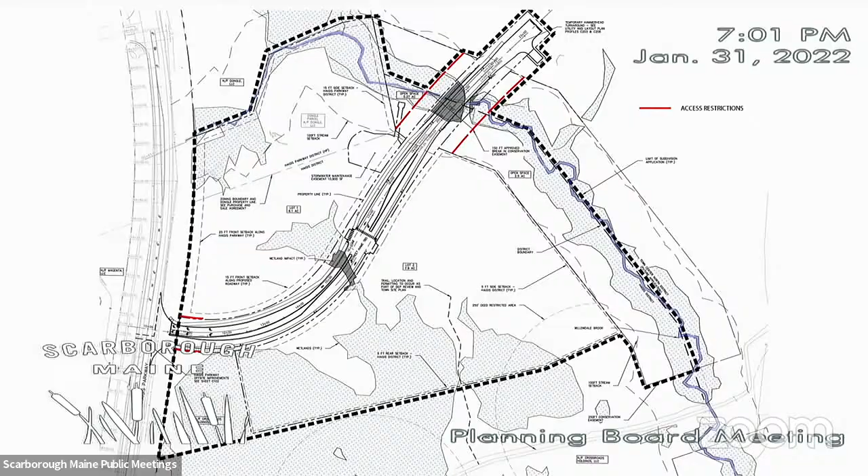Within those red boundaries is our approved break in that conservation easement for the road alignment. Those were all approved. So really what we're seeking through this subdivision application is to proceed on the town approvals to lay out and approve this segment of road.

And create two larger lots. Lot 1 is on the north side of the road, about 6 acres in size. Lot 2 is on the south side, around 8 acres in size.

Those two lots would of course come to you for site plan before they're developed. They also would go before Maine DEP before they're developed, because we need approval for stormwater design for those lots. This is very similar to an item later on your agenda, the Costco site, where we got a lot approved, built the road infrastructure, but marketed the lot before proceeding with permitting with the town and DEP.

That's really what we're seeking discussion on this evening. And then into final review is the ability to proceed with our state permits on building this segment of road, which actually can't generate any traffic or development until we come back to you with site plan and DEP approvals on the different lots.

We're not proceeding with the road past the stream because we're still working with the town council, the downtown committee, and we'll be coming to the board with an updated plan for the town center later this spring, could be late winter, to lay out that area of the project.

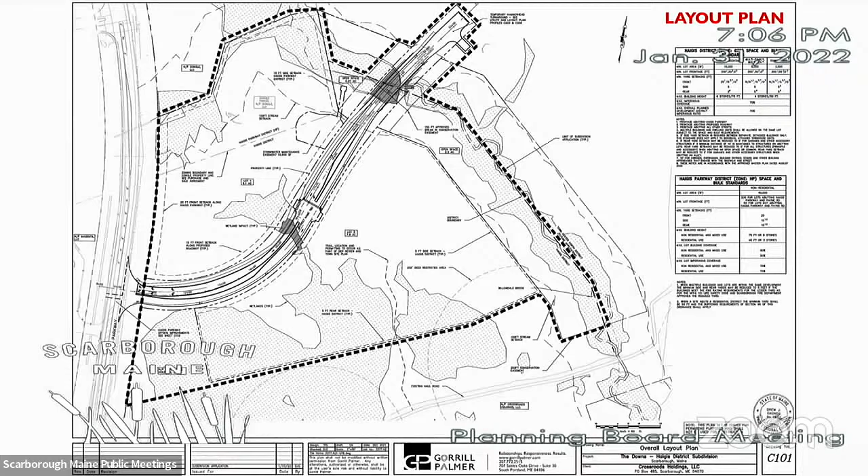With that, we're proposing an 8-foot wide multi-purpose path that would connect to the future town center that Dan was mentioning, and connect to pedestrian improvements along Haigis Parkway that will be also in the future per our Maine DOT TMP. That 8-foot wide path is going to run all along through the brook and all the way down the south side of lot 1 and terminate at the right of way, basically the intersection connection for future pedestrian connection. Along with that, we have an 8-foot wide, plus or minus, center island as kind of the gateway treatment as we enter the downs.

Our goal was to match the Payne Road side and the Route 1 side, where we have a large center island with a tree-lined boulevard on either side and down the middle, creating that signature appearance that you're entering the downs. We've continued that from Route 1 and Payne Road over to Haigis Parkway, and we're excited about that. We've also shown two entrances: lot 1 on the north side of the proposed road, and lot 2 on the south.

With these entrances, we're showing left turn lane pockets. There was a comment in the staff and peer review relative to queuing for these left turn pockets. We designed this road conservatively, not yet knowing exactly what's going into these sites, so we want to be conservative with our left turn lane queuing. We're happy to provide calculations and other supporting data to warrant these left turn lanes, which we think is a good design.

This is the landscaping plan I have up here. If we need to go back to it, it just shows some of the trees I was discussing along the center island and on the outsides of the road.

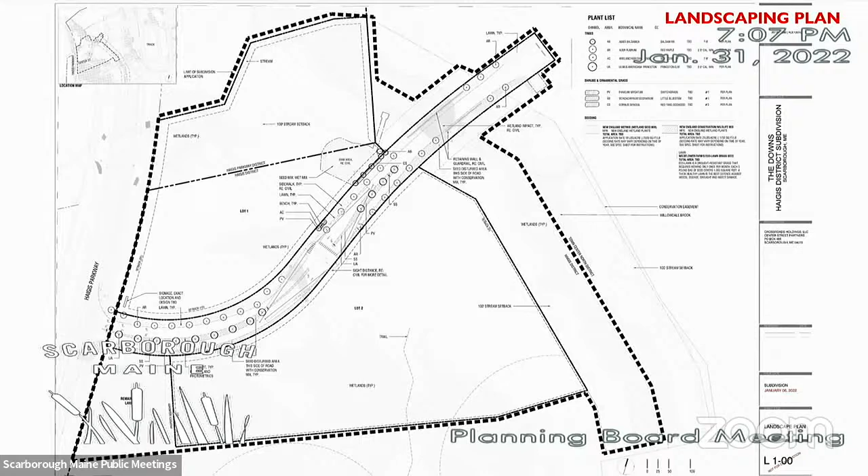As far as the utility plan, the dashed lines are the existing utilities in Haigis Parkway, and the bold lines are the proposed utilities as part of this subdivision. We're essentially isolating this area to serve only off Haigis Parkway, not using any existing or planned utilities on the rest of the downs parcel. We don't need to connect to anything on the downs from a utility perspective—everything can be served from Haigis Parkway from a capacity standpoint, which is good and cost saving for this team. We're terminating gas, 8-inch sewer main, and 8-inch water main at the lots 1 and 2 entrances, right in the middle of your screen. The red line is the overhead power that would be extended from Haigis Parkway, then go underground to serve the sites.

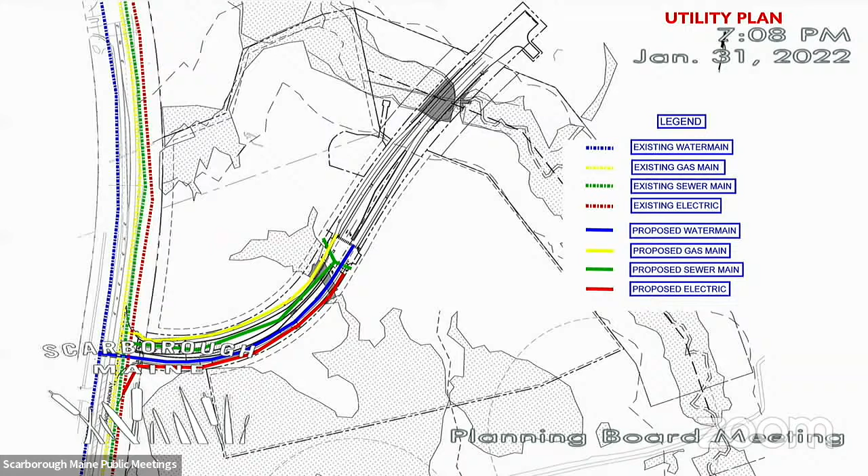The existing drainage in this area essentially all slopes to the north and east towards Willowdale Brook. Willowdale Brook wraps around the page, starting at the top, and flows downstream as it runs around the page corner there.

Per our Maine DEP approved stormwater plan, we have one grass underdrain soil filter in the top left corner of the roadway, which treats that shaded blue area—most of the roadway—consistent with our permit. Our permit was for a much larger area, so this is just one component, and this phase worked out to just one stormwater facility. This grass underdrain soil filter will discharge into Willowdale Brook under a permit rule we obtained for discharging within 75 feet of a stream.

In addition, we're proposing the culvert that Dan mentioned: a 4.5 foot tall by 11 foot wide steel arch culvert, open bottom. We worked with Maine DEP, Army Corps, and Maine Inland Fisheries and Wildlife in developing what that wanted to be. Just off this page is an impoundment of the stream—there's an existing crossing just to the right of the proposed roadway, which is really a failed crossing. It was an old logging trail that over the years hasn't been replaced and was very undersized, creating an impoundment upstream. We're proposing this culvert to alleviate the impoundment and get the water flowing through.

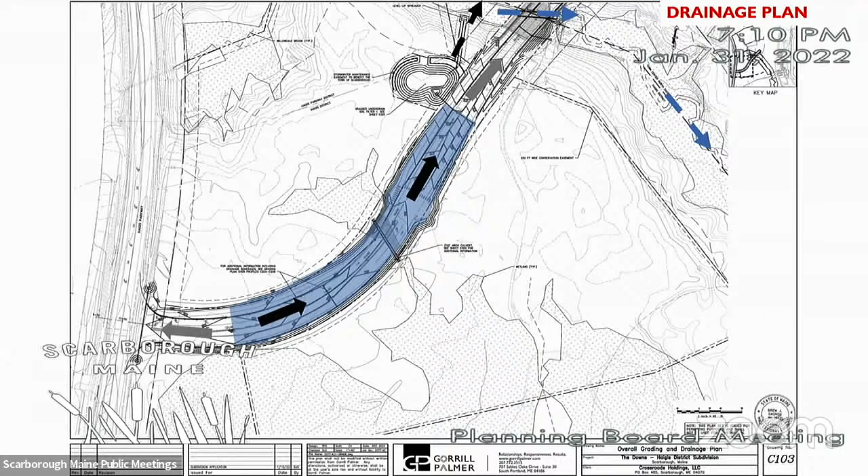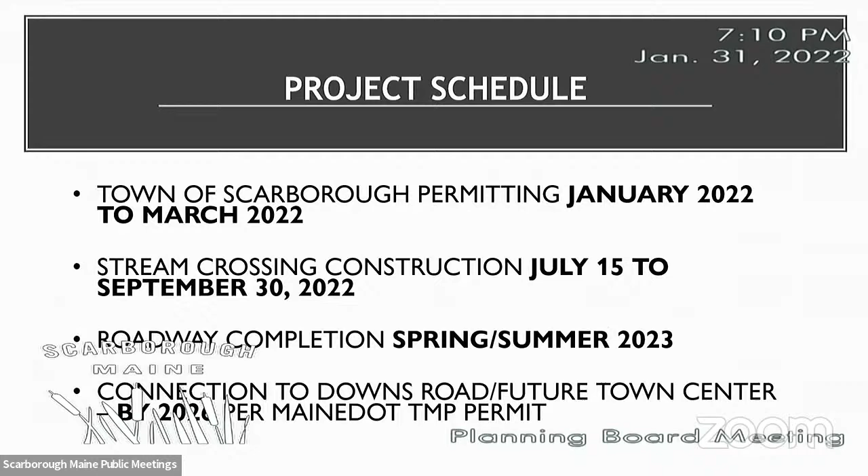Real quickly, the project schedule: Town of Scarborough permitting is anticipated in the first quarter of 2022. The stream crossing construction, which is really the critical piece of this whole application and subdivision that Dan was mentioning, is permitted between July 15th and September 30th of any given year. We'd really appreciate it happening in 2022, so we don't have to wait until 2023 to do this construction portion. Our construction team would like the roadway completion in spring or summer of 2023, dependent on weather and manpower. As Dan mentioned, connection to the downs and future town center, including a Payne Road connection, is expected by 2026, per our Maine DOT permit.

So again, we're seeking preliminary subdivision approval to continue our permitting process. We do acknowledge all the comments, we have read them. We're excited to work with the town, the peer reviewers, and more coordination on additional details added to the plan, as well as discussing any of them further. We're certainly happy to do that, and we'll definitely address those prior to final subdivision.

I do want to reiterate the control points that we have. The roadway and layout is essentially frozen, where we have to connect to the Haigis Parkway at this location, and we have to cross the stream at this location. So we're really just looking for the roadway construction in those portions and all of the environmental constraints. With that, we're happy to answer any questions and look forward to the future discussion.

Thank you. This is an item that's open for public comment. Is there anyone online who would like to comment? Please use the raise your hand function. Not seeing any yet. Still none. All right, I declare the public comment period over and open up to the board for questions and comments.

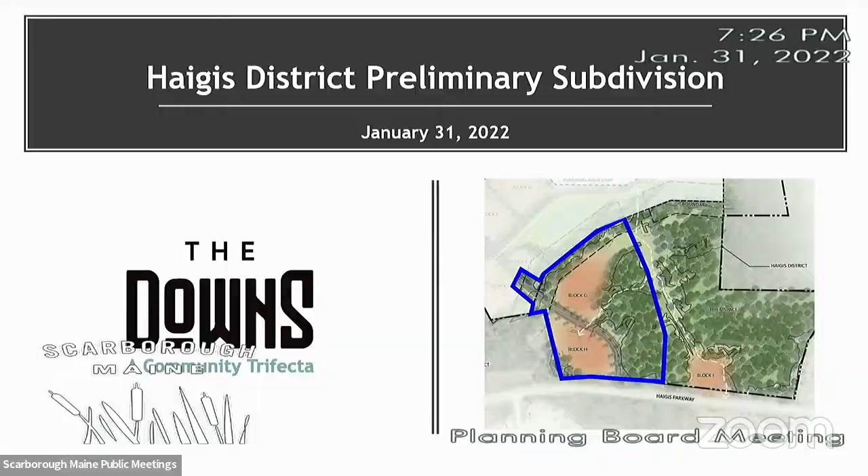So you're basically saying, for instance, I recall Main Street running off of this earlier Center Street as well — that may change too. This is very high level, but it shows the street we're talking about in orange, coming in here, then turning and intersecting with a north-south street in the vicinity of the existing Downs Road, if you can picture it, and then creating blocks from there.

That's sort of its own presentation, and we're excited to show you as we develop our plans. In light of this new direction and feedback from the Downtown Committee, we think it's going to look much more like this versus a roadway that ends up directly connecting way up here. If you can see my cursor — it's hard to see. Maybe you can't, I'll pull it up.

I'm going to get out the proper tool here. Okay, so right now, Roger, Center Street ends here in the Innovation District. And we think it's highly unlikely that this road here will make it all the way to Center Street as one contiguous street. So that's why we removed the name, and we want to work on a new name for this street segment that's before you for the subdivision.

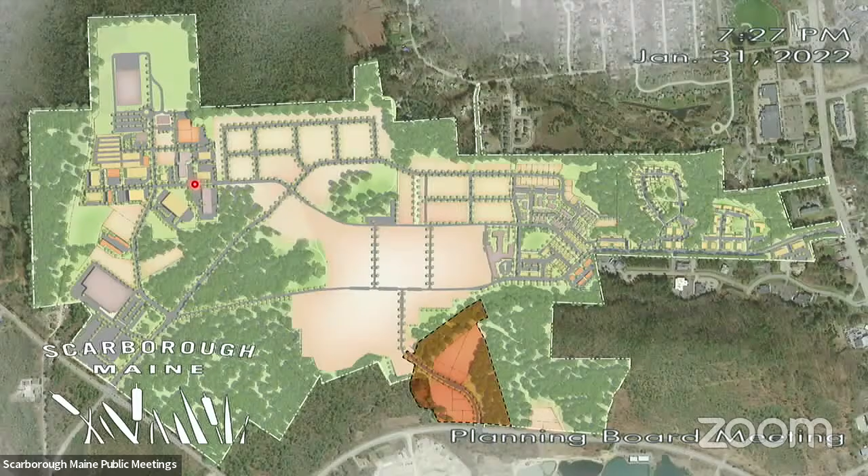Okay, I appreciate the insight. I have no further questions. As far as I can tell, this street's going to be pretty much like all the other streets in the complex. And the critical thing is to get that culvert at the stream crossing constructed this summer. So I'm fine with everything.

Thank you. Chad? The only questions I had were related to the temporary signage for, I guess, a dead end or not a through street. I guess we'll see that at a later point. Yes, thank you. Karen? I don't have any questions. All the board members asked a lot of really good ones, so thank you.

All right, thank you. Well, I do have questions. I know you referenced the culvert, and you referenced that you had chatted with wildlife. Is the culvert going to be set up, the crossing of Willowdale, so that there is space underneath it for the passage of small wildlife?

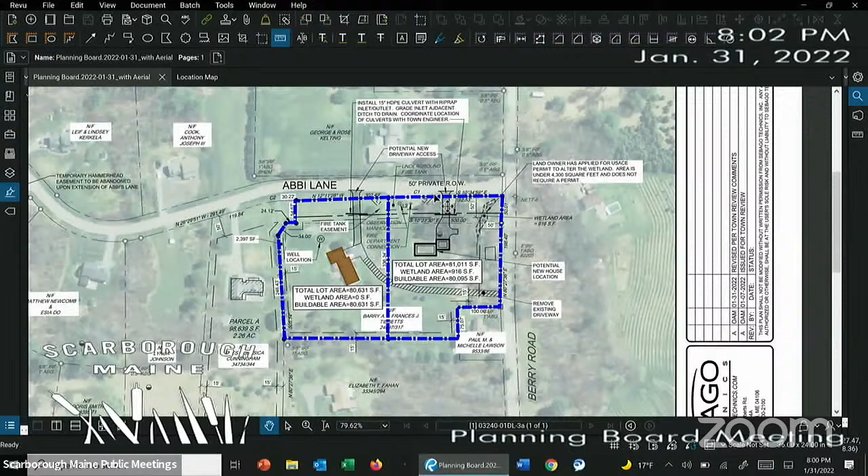These two driveways would be located at the very front of Abbi Lane. The development is very consistent with the general area. It doesn't add an additional burden onto the road or any of the other landowners on the road. And in some ways, it takes a driveway off of Berry Road, which is more of a primary road in that area, and puts it onto the secondary road, getting that driveway more in keeping with the goals of having roads off of the private ways. One thing that came up, and Angela brought it up, and she's 100% right, is it works well.

But in the original private way, there's a fire tank down here, it's really hard to see this, let's see if I can zoom in. There's an underground fire tank down here in this location, and for whatever reason, the original private way plan never had an easement that we could find that was created.

So Angela put in her notes, and we will create an easement for that so it's official. We're fine with the review comments by the staff, and if the board's willing to grant that waiver and those staff conditions, we'll make sure we work with Angela and Eric to address those. They're pretty straightforward, we think the project can be done pretty simply, and it provides an extra house, a new house, for a family member.

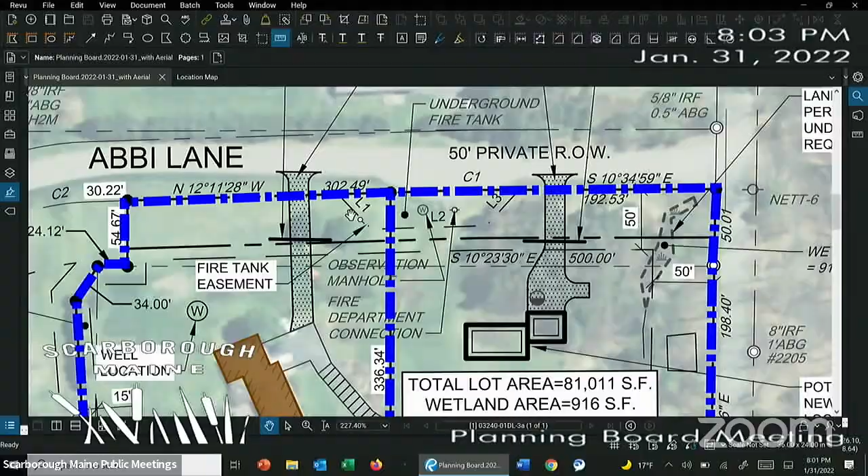Barry, do you have anything you want to add to this, or? No, great job. I tried to keep it as short as possible. You had a long one before, and I suspect you have another one.

Thank you. This is subject to public comment. Is there any member of the public in the room or online who would care to comment? I'm looking online, waiting to see if a hand goes up. I'm not seeing any as of yet. Still none. All right, then the comment period is closed, and I turn it over to the board.

Are there comments or questions? Jay, can you tell me if one of the board members is raising their hand? Rick Meinking. Thank you, Madam Chair. This seems pretty straightforward to me, at least, and I don't have any questions. I just wanted to pipe in and say that from my perspective, this seems pretty crystal clear and within our purview. I'm just wondering if we were to do a motion, if we needed to add anything about that easement for the fire connection.

That's more directed toward the staff. Go ahead, Angela. I guess I'm sorry if I made this more complicated than it was, but I took the opportunity to have it in front of us when we were doing the review for the planning board. I also incorporated my private way standards review at the same time, so I did one review, and those comments got back to them so they'd have them.

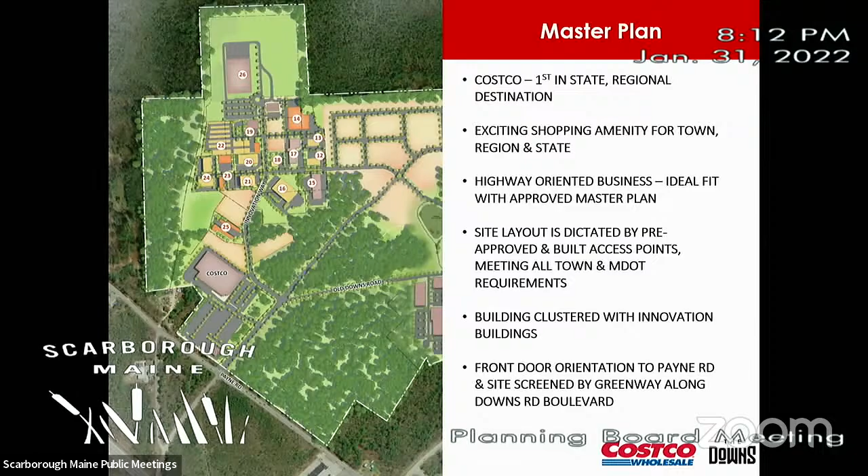And I know the board has been working with us for a number of years now in terms of the Innovation District and the improvements on that end of the project. So you likely remember and are aware of this, but two of the proposed access points are already constructed to this site. Lot 1, 1A and 1B were part of your earlier subdivision approval from a few years ago.

Infrastructure has been put in the ground in terms of utilities and overhead power to serve this site. The access point off of Downs Road coming in from the Payne Road intersection is already stubbed out to the site, as is the driveway that would serve this site on Innovation Way. Just as you come into the Innovation District on the left, there's a driveway and left turn lane already installed. In addition, the town and the DOT have approved a right-in, right-out on Payne Road. It hasn't been built yet, but it's been approved by both agencies.

This design has been put together in light of those access points, layouts, and existing approvals. The other piece in working with Costco on their initial layout is clustering the Costco building with those Innovation District buildings, so it feels like one commercial neighborhood. That's driven, in addition to the utility and access layout, the layout of the Costco site, so the buildings are close to the other buildings as you come into the Innovation District.

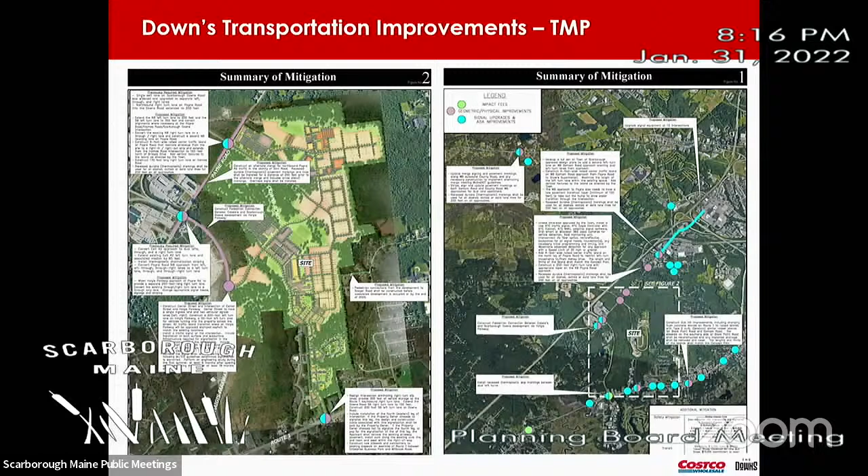I think the construction schedule for actually being open for business is going to be the end of 2023 into early '24. So the improvements at the Downs Payne Road intersection will be done this year, as well as improvements at Exit 42, where there'll be a right turn lane, and at Haigis Parkway, with improvements in front of Ginn Road. So really the Payne Road corridor, ideally under the TMP, is going to be complete in advance of the additional traffic that an end user like this generates. I thought that was important to point out.

Again, not so much for the board, but for those that might be watching. I think lastly, and I'll turn it over to Michelle on the site design, is the design character. This was brought up through staff comments.

One of the overriding principles of building design and architecture character is fitting into the broader district. Given the location of Costco right adjacent to the Innovation District, Costco has worked well with our team initially on using building materials like metal siding and glass overhead doors—contemporary, high-tech materials indicative of the Innovation District and modern, corresponding well with some of the best buildings within the Innovation District. You just approved the IDEXX this evening, really a building of similar scale and similar materials, and the Crown building is close to complete, as shown on the screen.

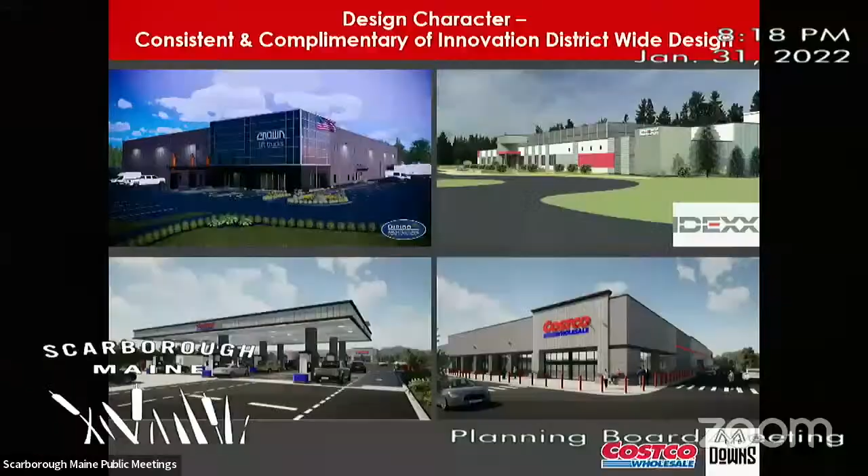Some of the closest Innovation District buildings that we're really proud of are Throttle, the Score Builders, and the AV Tech buildings. This is Innovation District, more light industrial buildings, but we think the layout of Costco really serves as the gateway into the Innovation District.

From a design character standpoint, it fits in and meets those design themes. Thinking about the commercial design standards, we think it has a lot of elements that also meet them, though there are variations that are more modern than, say, the Sam's or the Super Walmart. Those buildings have a shopping center character from about 15 years ago, trying to look like more traditional New England buildings. Costco's approach at this point is really trying to fit into a more modern, innovative design from a building material standpoint that's not necessarily a shopping center, and more in compatibility with the Innovation District and the character of this part of the project.

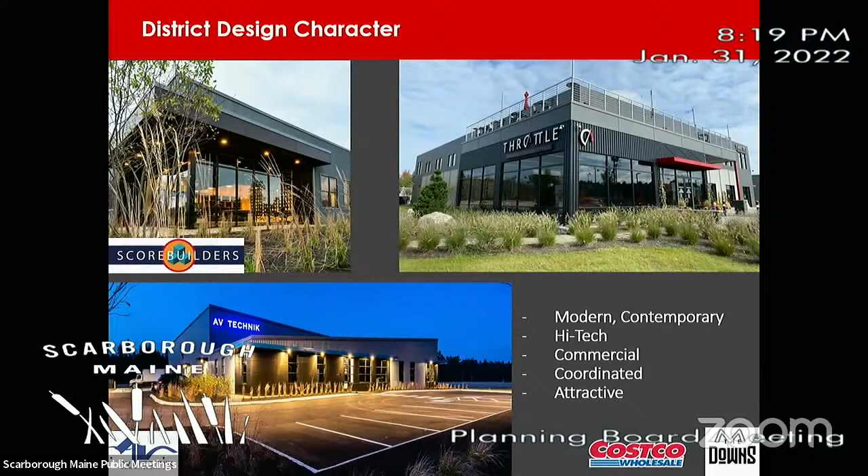So with that high level introduction, I'm going to turn it over to Michelle to walk through the details of the site layout.

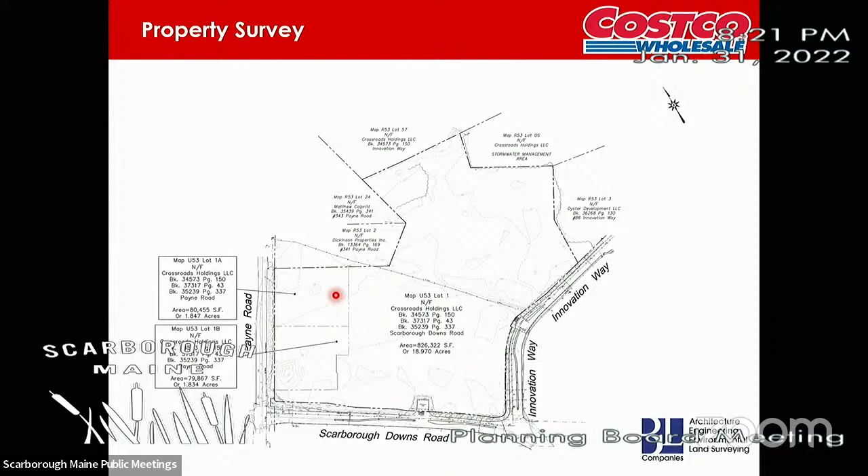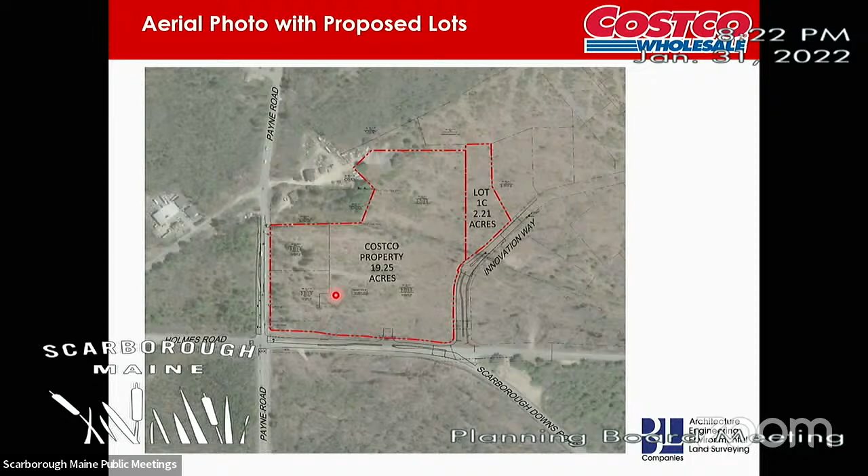It's easier to see with the red here. You can see lot 1C off to the east on the aerial. That'll be about 2.2 acres, and the Costco site approximately 19.25 acres.

This is the proposed site layout. The Costco building is set over here, and the reason it's situated where it's at is because we'd like to keep the back of house away from any main roads. This side is the loading area.

Right here is the loading dock, with doors on this side. You can see the compactors—you might not be able to see them unless you're looking closer—they're internally fed on the north side of the building. There are other miscellaneous doors in the back for smaller access.

The main front of the store is right here. Costco has years of experience operating and understanding what they need for their customers, and they want to get as many parking spaces surrounding that front entrance. That's why they're typically laid out like this, so you get massive parking in the front of the building. Over here is where we're proposing the fuel station.

If you recall, some of you were here in June when we met, I think on June 16th or June 15th of 2021.

The gas station was actually here on the hard corner, and we felt it was better suited up here after we kept studying the site and the guidelines and trying to make sure that we were in conformance with the innovation district standards. We felt that the gas station was better suited where we have it here.

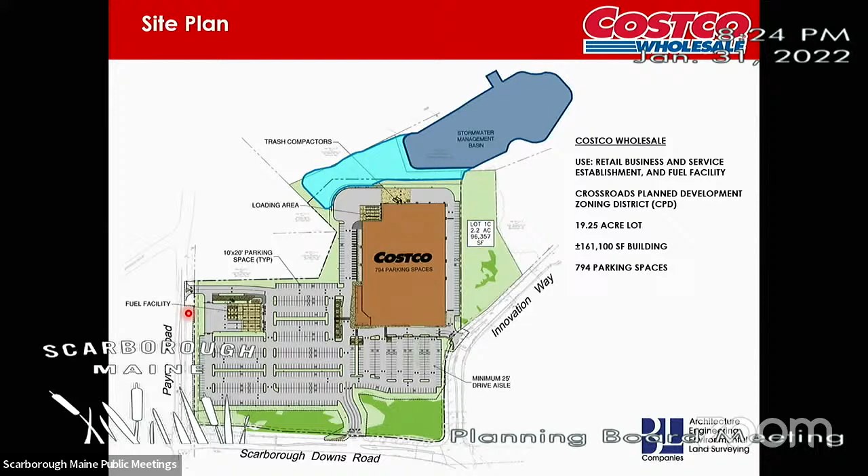This is a truck turning template just to show you how the trucks would get in. The gas station truck would come in here and offload the product here, and then it would come out and exit onto Scarborough Downs Road. The deliveries would come in the back way here, through the back of the house behind the building and around to the loading area, and then they would circle back out the same way they came in.

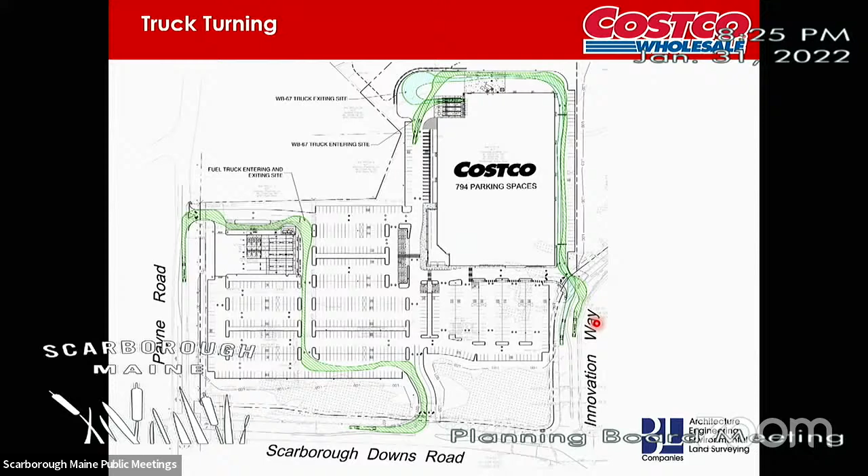Stormwater management - the majority of it is going to be through extending the existing wet pond that's out there. The dark blue is the existing wet pond on site, and we're going to extend it where we have the light blue for the Costco site. The light blue lines on the drawing are the areas where stormwater is going to be collected on site, and that's going to go to a forebay first and then into the wet pond. The darker blue from the canopy of the fuel station - that water is going to be collected and discharge to the wetlands to keep continued stormwater and keep the drainage patterns the same as they are today.

The canopy has a white roof, so that will help keep the water a little bit cooler for the first flush versus if it was a black roof. They're typically white roofs.

Also, probably getting into too much detail, but groundwater is high - groundwater is 1 to 2 feet below the surface. So it's not feasible to install underground infiltration systems. We looked into that. We always look to try and infiltrate as much as we can and recharge, but the groundwater is very high here.

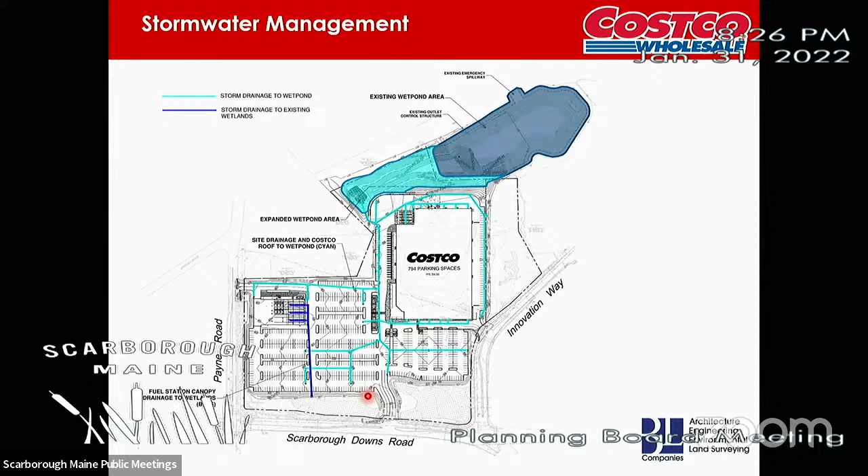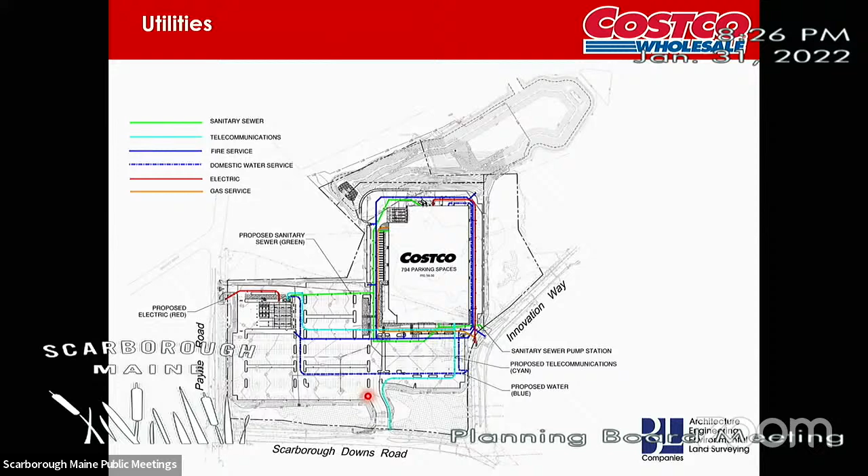This plan just shows the site utilities. We're pulling water, sewer, electric, and gas off of Innovation Way. Dan already said the infrastructure is in place, so we are going to be using the existing utilities in the street and connecting to them. The loads are sufficient for what we need.

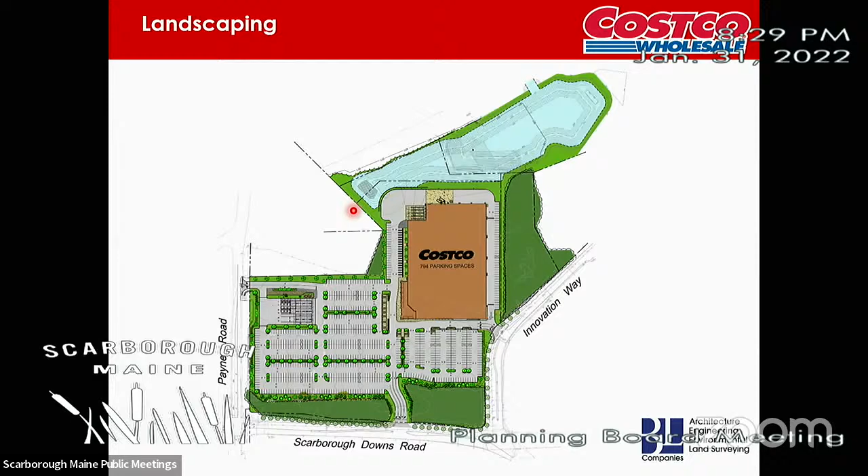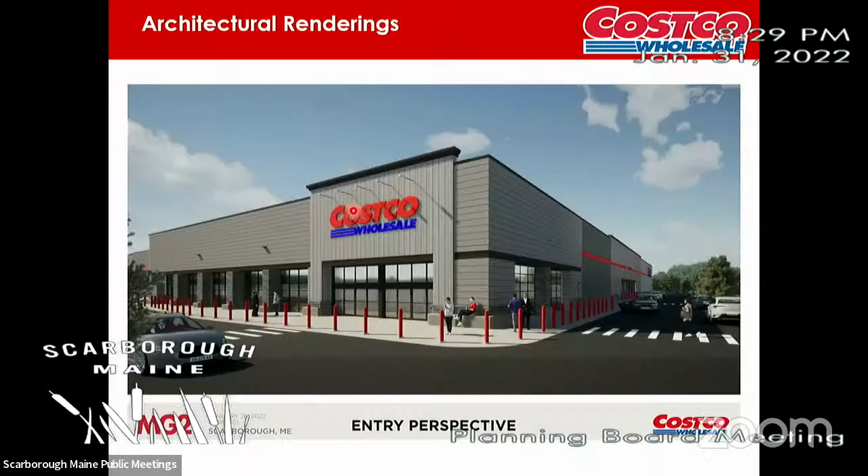And then Angela, are you on? Do you want to talk about architecture? I'll advance the slides for you. Yeah, let me get myself off of mute here. Hello, I'm Angela Balmer. I work with MG2.

We're Costco's master architect. We had a pretty good opening presentation talking about the Innovation District, and basically the architectural materials and design were selected to reflect the modern, contemporary character of the Downs development and the Innovation District. For the most part, we have metal panels that we've selected with darker highlights, caps, cornices, and accents of a darker material, very similar to the other designs for the Innovation District that you've already reviewed. We do have a flush apron out in front of the entryway, kind of a gathering space.

for when the members are coming from the parking lot, to focus their attention and activity to the front entrance. We do have some areas that we've defined along the thickened base of the wall there and around the front entry. That's basically to allow folks to get their hot dog and their Coke and come out and have a seat and enjoy the wonderful weather of Maine on those bright and sunny days.

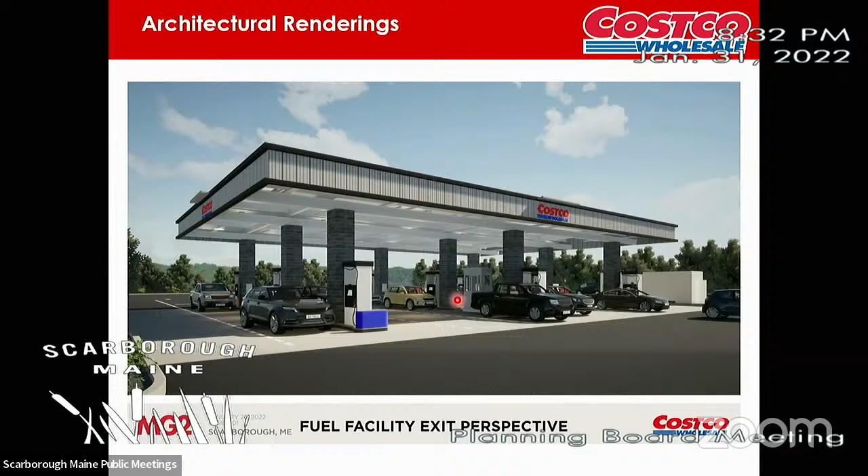And then we have Mark from Costco that would also like to speak. Would you like to hear him first, or do you want to ask Angela and I questions? I think we'd prefer that you complete your presentation, and then we go to public comment, so the public would have the chance if they have a comment, once they've heard everybody. Okay, Mark, would you like to talk a little bit about Costco?

Sure, I'll give a brief introduction. My name is Mark Marchisano, I am Director of Development at Costco Wholesale. I appreciate everybody looking through our sketch plan. As Michelle said, we want to share everything that we've had to work with the Downs. They've been a very, very interactive group, and it's been a pleasure working through all the different items that we need to look at.

Costco, as Dan had mentioned, this is our first foray into Maine. We were founded in 1983. We have a total of 828 warehouses worldwide, 572 of those in 47 states and Puerto Rico, so Maine would add one of those. We are in Massachusetts, and we have members who come visit our warehouses from even northern Maine and northern New Hampshire, so the market has really pointed us to find a location within Maine itself. Costco is very interactive with the community—we become members of the community, just as we hope you'll all become members of Costco. We are a retailer, a warehouse retailer.

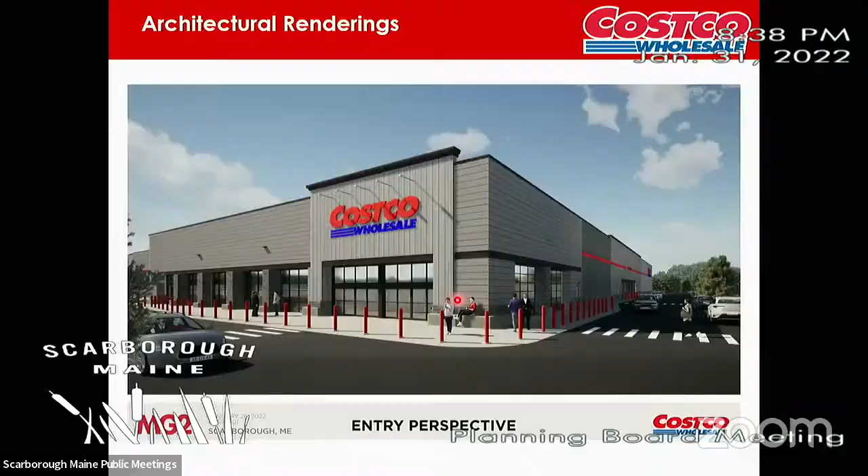I've got a note here, I apologize—the host has asked to start my video, but my video is not working on my computer, so I apologize. That's okay, Mark—one of your folks has been flashing names, kind of like Vanna White, to make sure we know who is speaking. Okay, so if it's not working, that's okay.

Just to quickly round up the introduction to Costco—there are many things we can share as we go forward, about our employees, the benefits they get, and what we offer the community and our members. To give an introduction to how we operate: our hours are typically Monday through Friday 10 a.m. to 8:30 p.m., Saturday 9:30 to 6 p.m., and Sunday 10 a.m. to 6 p.m. The fueling facility usually has the same hours, though we try to open about an hour earlier and stay open an hour later, depending on the location.

The way the warehouse building operates, we're a single entry facility. Any other doors you see around the building are simply for emergency access and egress in case something happens, but all the members tend to come in right through the front door. As Angela and Michelle explained, that's how we like to keep the majority of our parking with clean, safe access to the front door.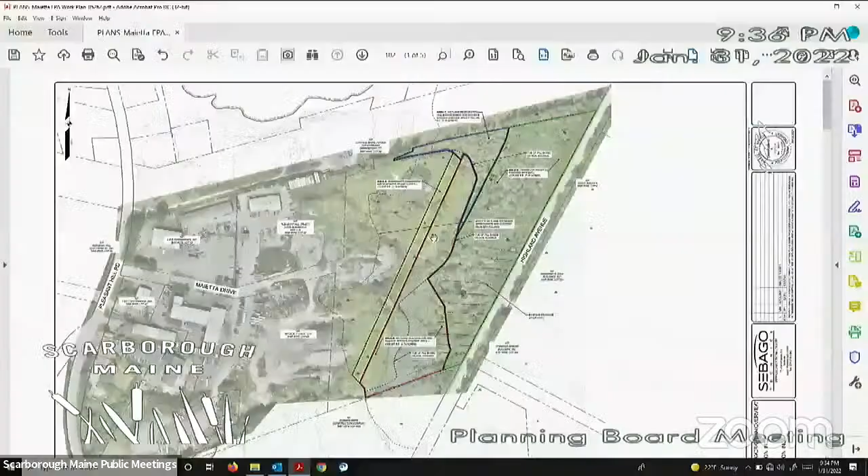As Eric was reviewing, the project involves several different steps. The first being the removal of the fill within wetlands. The second being removal and control of invasive species within those wetland areas and the disturbed areas surrounding it. Then replanting those areas with native species and reestablishing the hydrology to support that wetland restoration. We have a plan here. It's a little bit tricky, so I'm going to zoom into it a bit here.

So there are 4 specific areas that Maietta worked with EPA to define over a period of time. I'll start with area A, which is this very narrow area outlined in yellow. That is basically the fill slope from what will be a regraded area uphill of that, the 2-to-1 slope we talked about that's in excess of the 4-to-1 slope that's allowed. That will be stabilized with conservation seed mix and stabilizer, so it won't lead to erosion.

We have the biggest area, which is B here. The majority of that area is where the fill will be removed from. It also has a pretty healthy stand of Phragmites in this lower area, which will be removed and then controlled over a period of several years.

We have area C. Just to make a note here: area A is a little over 1 acre, area B is a little under 5 acres, and area C, again, is a little over 1 acre. That's the area outlined in blue.

In this area, it's more of a disturbed area with some native vegetation, so there won't be any removal of fill per se, but just spot treatment to control the invasive species and replanting where we need to.

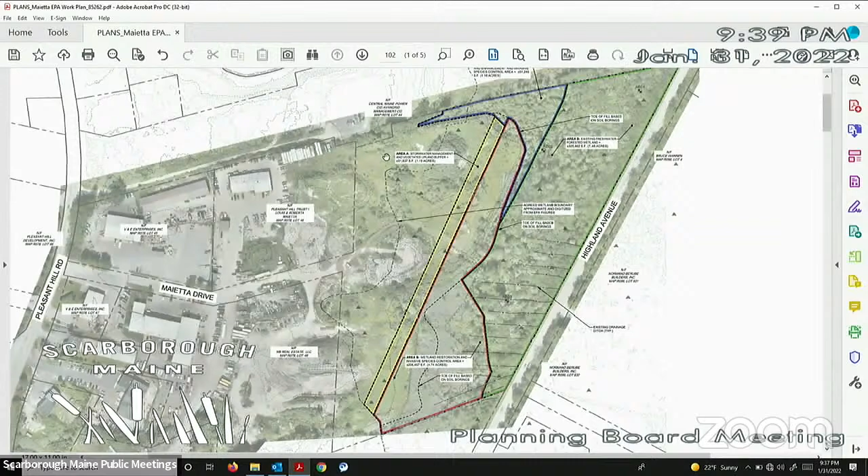So I'm going to go into the next plan here. This is the grading plan that was submitted. Starting back here, you can see these lines as the site will be regraded and will pitch towards this wet pond stormwater BMP that's right here on the edge, the western edge of area A, as I described it previously.

This area historically has been used for stockpiling construction debris, loam piles, all these different products that have come out of different construction projects. Those areas will be cleaned up and graded, so all of those stockpiles will be removed.

And this stormwater BMP has been sized to handle any future development. The project that we had before you tonight does not include any structures, buildings, parking, or lighting. In the future, we've proposed this grading and the stormwater BMP to handle any future development. Of course, any of that would have to come back before you through site plan review.

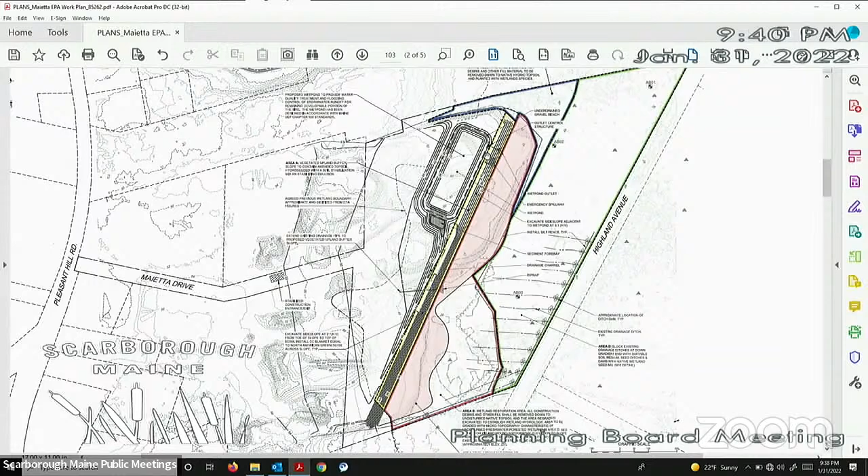That's sort of most of it in a nutshell. Looking at the comments that we have from Woodard and Curran and staff, a few good ones, relevant ones, are our approvals that we're working through with DEP.

As Eric mentioned, DEP has been a part of the conversations with EPA over the course of years. They've been kept informed, but we still at this point need to submit a stormwater PBR because we're over an acre of disturbance. That's pretty straightforward. We're also submitting under section 12 of the NRPA for permit by rule for the wetland restoration. So we'll be submitting those 2 permits, and we'll give you a copy of those before our next meeting.

Then the other comment here was asking some specifics—maybe this needs a little clarification for me—about what additional information is needed about the sizing for the wet pond. Chris can answer any specific questions about the considerations that were made in sizing that.

But again, the idea was to size it so it can handle any future development. So it's installed and it's there. And then Vinny would come forward with a site plan to show how that's being accommodated. Let's see, I think there were some minor things. Oh, signage.